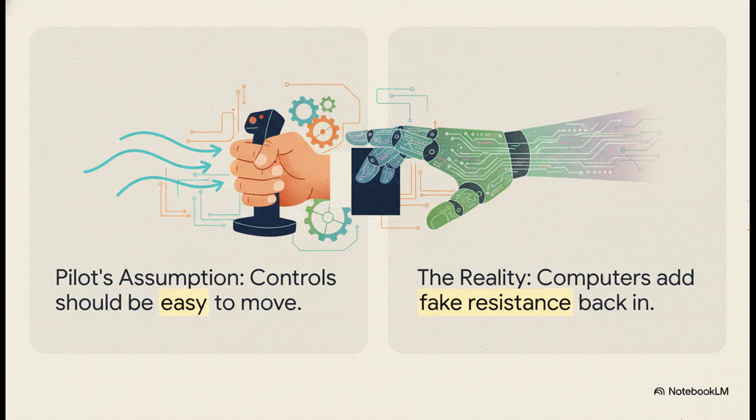Let's start with how pilots actually feel the plane. You'd think effortless controls are a good thing, right? Well, for a pilot, that can be super dangerous. So engineers did something totally counterintuitive. They actually added fake resistance back into the controls. This system, called artificial feel, gives pilots that crucial feedback, preventing them from making huge errors.

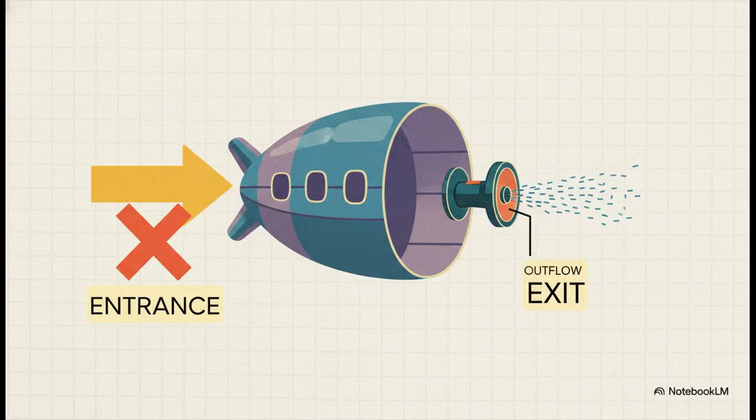Speaking of counterintuitive stuff, let's talk cabin pressure. The answer is the exact opposite of what you'd think. It's kind of like a leaky balloon. The system doesn't just pump air in, it actually controls the leak. A single smart valve manages all this, protecting the plane from dangerous overpressurization. It's that simple.

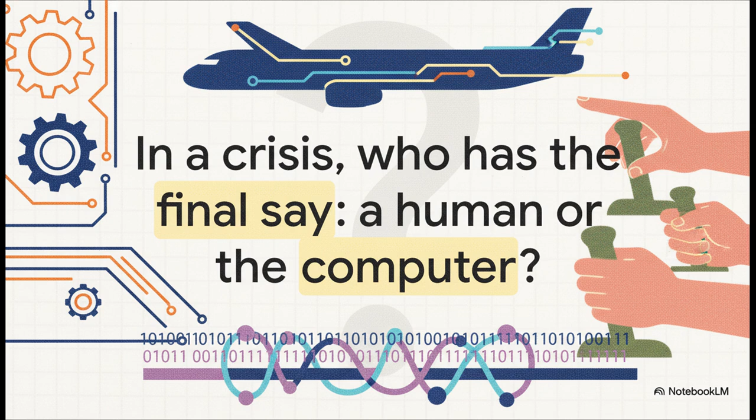This brings up a fascinating question. In a crisis, who's really in charge, the human or the machine? Imagine this. Air traffic control and the plane's computer give conflicting orders. Who does the pilot listen to? The Collision Avoidance System, TCAS, might issue a direct, non-negotiable command, just like that. The golden rule: the pilot must obey the TCAS, because it's also talking to the other plane, coordinating the move.

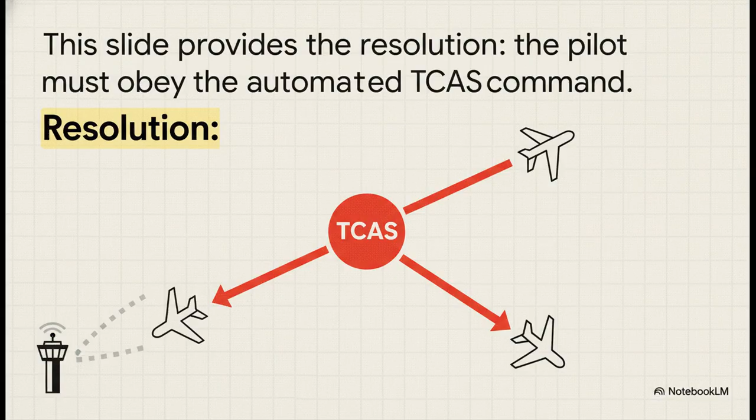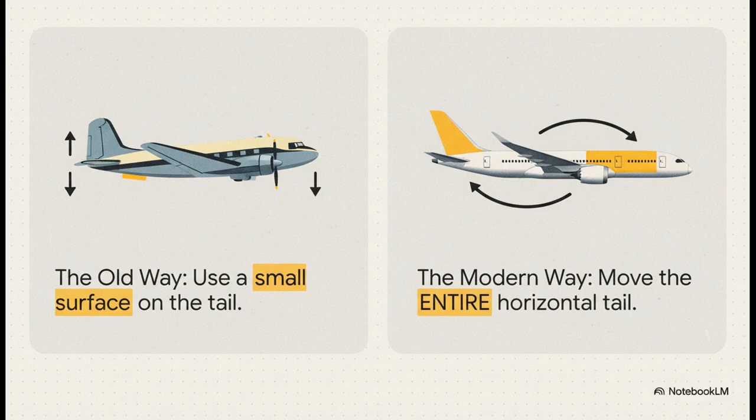Now let's talk about balance. As a plane burns fuel, its center of gravity shifts. So how does it stay stable? Older planes used a tiny flap on the tail. Modern jets, though, they do something way more radical. The entire horizontal tail actually pivots, constantly adjusting the plane's balance. A brilliant and fuel-efficient design.

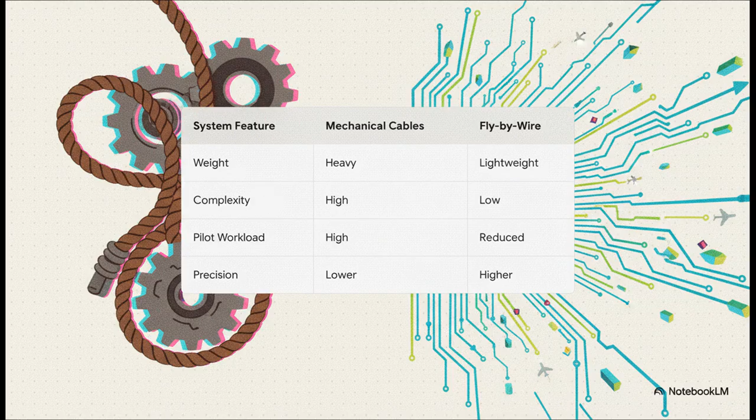So how do all these systems connect? Let's look at how a pilot's controls connect to the wings and tail. Forget heavy, complex mechanical cables. Modern jets use a revolutionary digital system called fly-by-wire. Now, a pilot's movement sends an electrical signal to a computer, which then moves everything with precision.

Each of these systems is like a masterpiece of engineering that works together in a kind of hidden symphony. It's just a brilliant illustration of how the most genius solutions are often hidden right in plain sight.